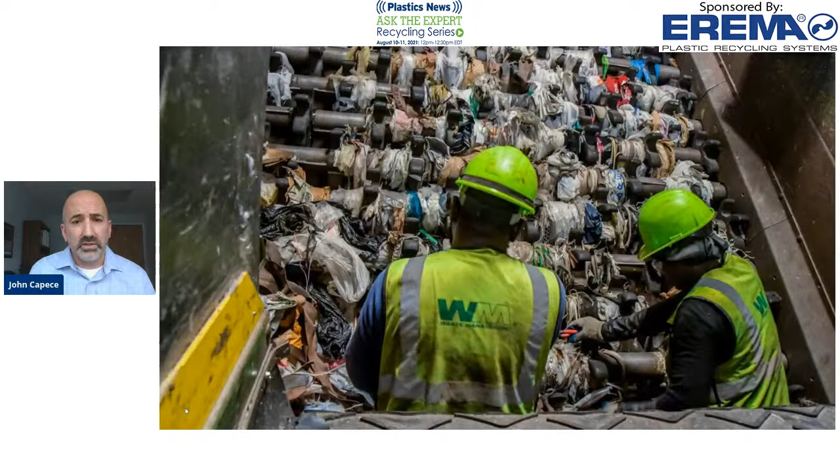So this would be an example of the processing issues on the bags. At the moment, they have a tendency to get caught up in the rotors, causing tremendous amounts of downtime. So in order for these folks to keep up and running, sorting through the other types of materials that are recyclable, these materials are being collected in different manners, like collection bins at the front of a supermarket or a retail store. That way they can go to a dedicated recycler that is equipped to process them. Next slide.

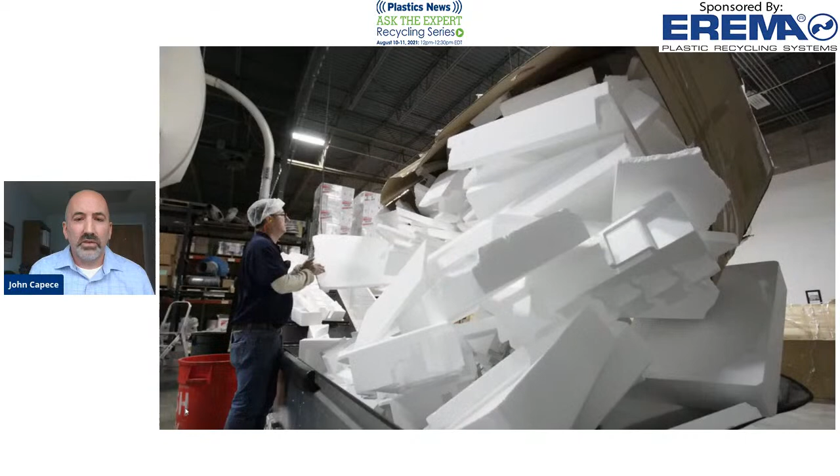And then on the polystyrene side, one of the challenges is just the bulk density. They take up enormous amounts of space. For example, if you were to take this styrofoam packaging and fill up a 53-foot trailer, it would probably only weigh about 3,000 pounds. And then imagine hauling that across the country to the processor that's equipped to actually pelletize this stuff. The financials don't really make too much sense.

So the solution for this type of material is to really compact it and then ship it after that. We don't seem to be at that level where there are enough processors out there willing to take on this challenge, where they can collect, compact, and ship for further processing. Next slide.

Okay, there's a whole variety of different post-consumer plastics that we could talk about today, but we have a short amount of time, so I just wanted to provide a couple examples of input materials that you would typically see in a post-consumer resin. It could derive anywhere from a HDPE milk or juice container collected from households to HDPE rigids. These would come from like detergent or shampoo bottles.

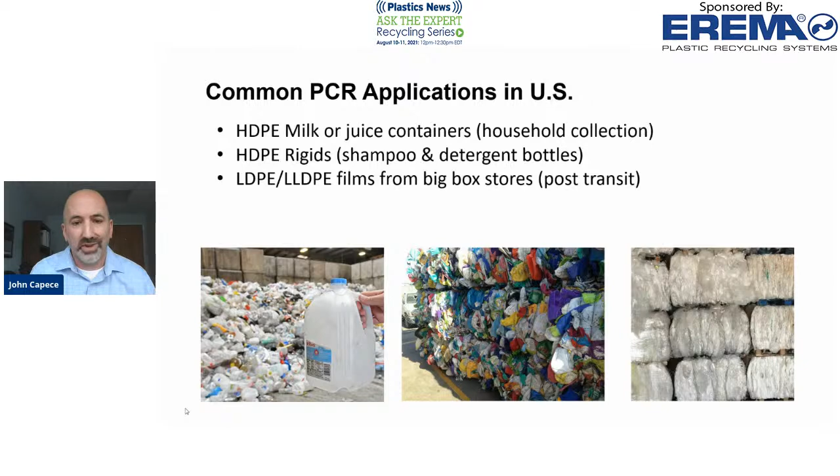Most of the time, the majority percentage of these bales are the polymer that the process is interested in extracting, but there are other contaminants that we'll talk about further in the presentation. Next.

Okay, so types of contamination. When you think post-consumer materials, it's already been in the hands of someone that uses it. There's shipping involved. There's all sorts of different types and levels of contamination, anywhere from paper labels, stickers, different types of adhesives. Keep in mind those labels are actually put onto the films or packaging with adhesives, so that adds another processing element. We see things like foreign plastics.

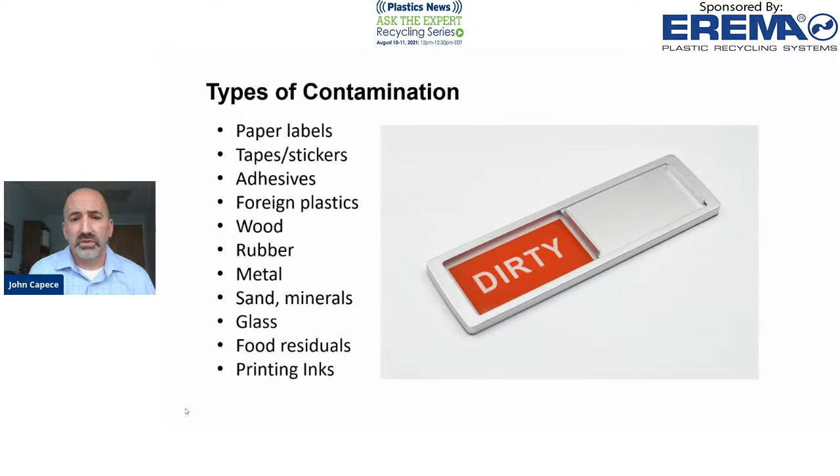So if you were processing a bale of stretch film, that could be PET bottles, for instance, within that bale. We see things like wood, rubber, metal. Metal could be ferrous or non-ferrous, aluminum cans or just pieces of steel. Anything from sand and minerals to glass, food residuals, and of course, printing inks. Next.

So this brings me to my next topic. You have this material that's already been in the hands of the consumer. It could have any or all of the contaminants that I mentioned in the previous slide. So one of the necessary steps is to sort the material. And what we're trying to do here is remove anything that's unwanted.

So for instance, if you were a processor that was interested in those stretch film bales, you don't want any paper or cardboard in there. You obviously don't want any metals or glass or anything like that. So after you open up that bale, you would need to sort, ultimately ending up with the polymer that you're interested in. Next slide.

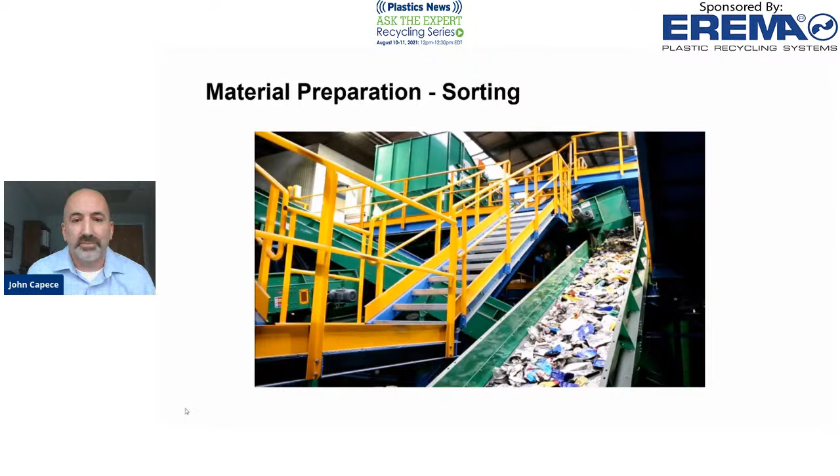So in addition to sorting, now that you've taken out all those other known contaminants, there are going to be things, say on that film, like the labels that we talked about, that need to come off. One of the ways we do that is to send the material through a washing system. Now, EREMA is not a manufacturer or supplier of a wash system. We do work with many in the industry, but the idea would be to deliver to the EREMA equipment input material that is previously washed, to get the majority of that dirt and sand and labels and adhesives off.

There are different types of wash lines, and I'm not going to get into it because I'm not a wash line expert. But the two main options are either a hot or a cold wash. What we've learned through the years is that particularly in the removal of labels, the hot wash is most effective because it loosens up that label from the film, melting to remove the adhesive. So you get that adhesive and label off, and the material is coming out much cleaner.

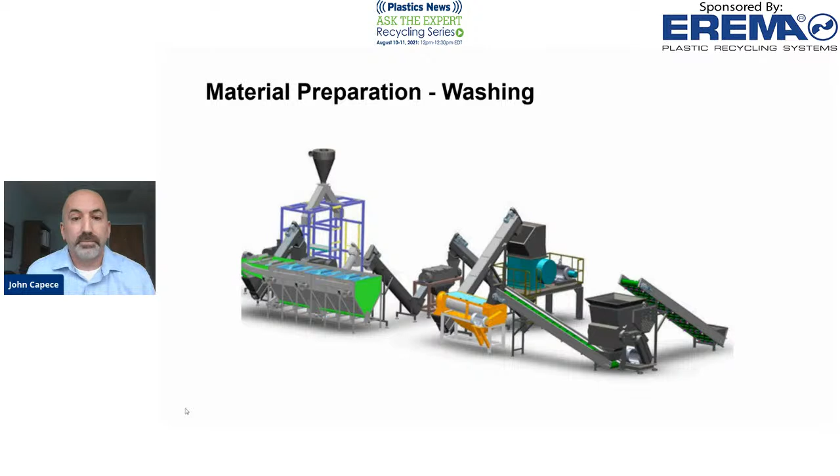And keep in mind, the reason that we're doing all these steps, the sorting and the pre-washing and all that, is ultimately to achieve a pellet quality that is very high and desirable. Next step.

Perfect. So here we have the EREMA solution to post-consumer recycling, and that model name is our Intarema TVEplus. What you see here is essentially a complete line from input material going on the in-feed conveyor, going up through metal detection, coming into our preconditioning unit. Then we filter, degas, and pelletize. Over the next few slides, I'm going to talk about that in a little bit more detail. Next.

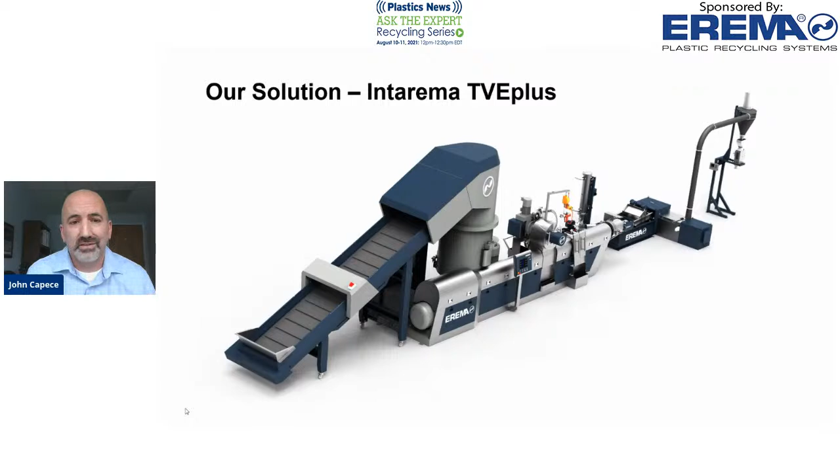Okay, great, thank you. So the EREMA preconditioning unit is the heart of the EREMA systems. This is where material comes into the drum, and on the base of this drum is a disc that's rotating at very high speeds, up to 750 RPM. Affixed to that disc are knives and knife holders that are cutting up the material, preheating, drying, homogenizing, and if the customer requires it, we can actually dose within that drum. A lot of these features give you benefits; because we're preheating the material in the drum, we're actually able to offer a shorter screw.

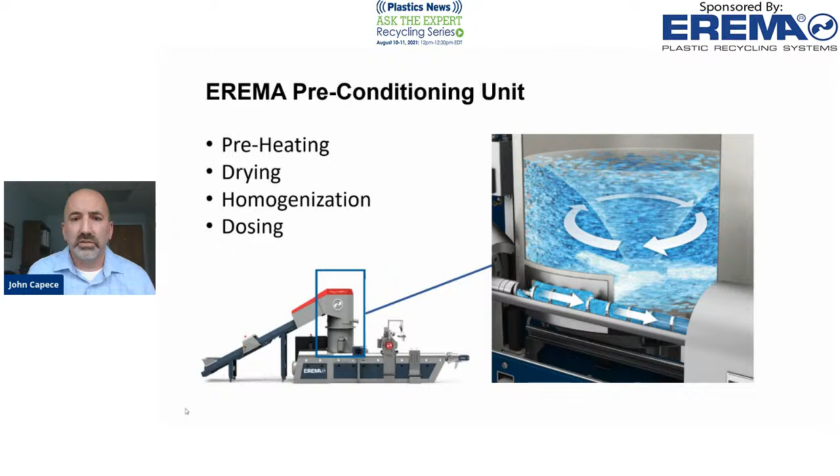Lowering that L over D obviously minimizes the dwell time of the melt in the screw, which ultimately will give you a better quality melt. And in addition to that, the preconditioning unit is providing a constant load on the intake section of the screw, and that provides a nice stable process. So it's a continuous process. When you're operating equipment like this, you always want everything to run very stable, and the preconditioning unit always providing a constant load on the screw is an important element.

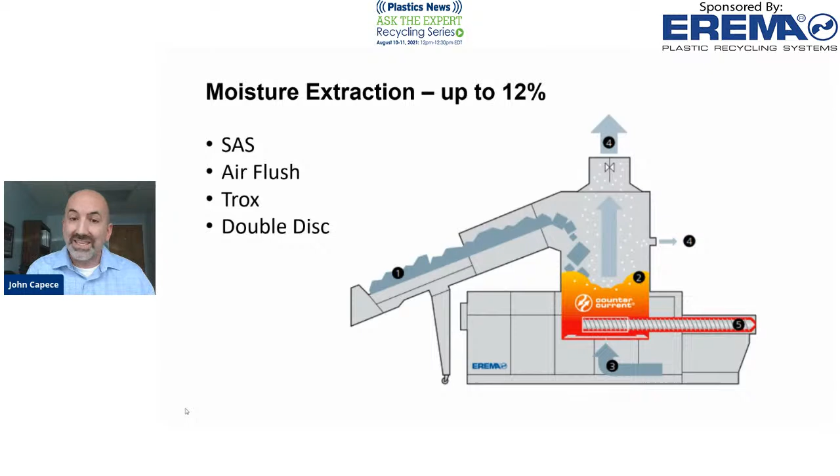But by adding things such as our SAS, which is a vacuum of air coming out the side of the drum, air flush, which is positive airflow into the base of the drum, and a Trox exhaust on top, the percentage of moisture in that material can be increased as much as 8%. And if we add a second disc, we can actually accept moisture up to 10 to 12%. So really, the EREMA is a perfect fit following a wash line because we're able to handle material in line without doing any offline drying.

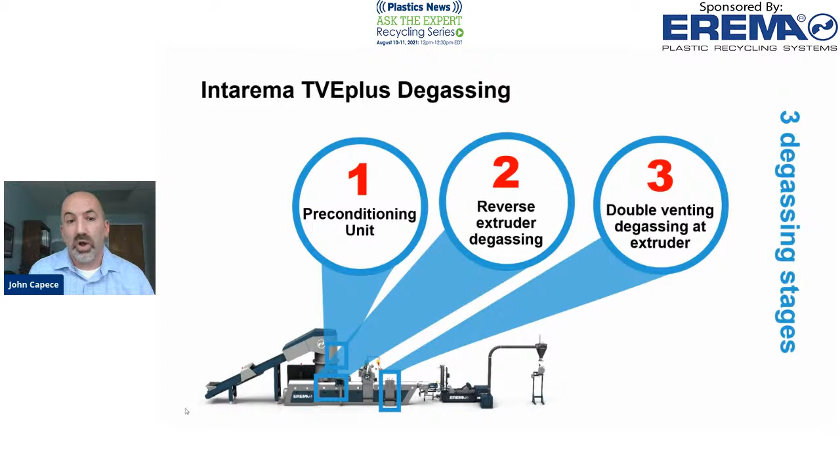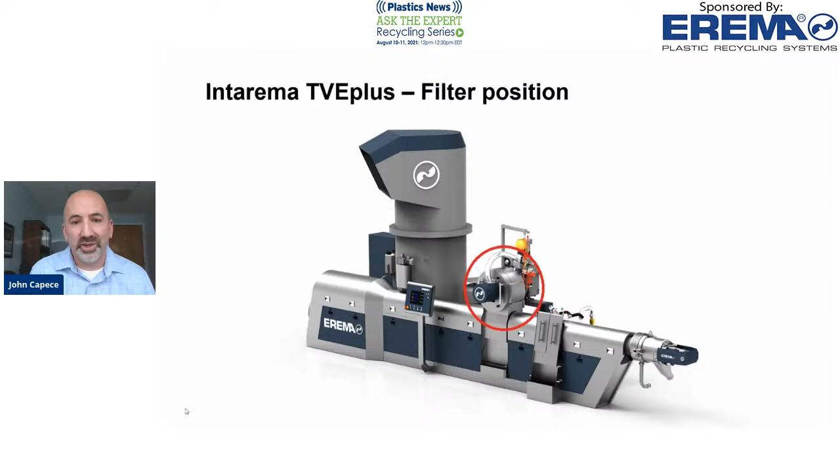All right, so a little bit about the laser filter itself. For people inquiring about the filter, the first question is, where are the lasers? There's no lasers involved in the filter itself, but actually we use them to make the filter discs, and it's made up of millions of tiny little holes. It takes about 2 to 3 hours to make just one of these discs, and we can go as low as 70 micron. We're doing some testing with 50 micron, but the idea is that the filter is continuous, which means that once you set it up with the correct discs and get running, it's continually removing contaminants off of the disc and then purging them into a container that lies beneath.

And the filter is rated for up to about 5% soft contamination. By soft contamination, I mean things like wood, rubber, foreign plastics, things of this nature. It's not designed to remove things like rocks and stones and glass. These are hard contaminants that can be damaging to anything on the line.

One of the things that our customers like about this filter is that it can handle very high pressures, up to 320 bar or 4,600 psi, and that it saves an enormous amount of labor because you're not paying someone to constantly change screens. Like on a typical screen changer, when you're dealing with higher levels of contamination, you end up changing screens a lot. So in addition to the cost of the screens, you're paying someone to stand there all day long and change these screens. The EREMA laser filter is perfectly designed to run nonstop for weeks at a time, for instance. The screens that are in there can be removed and cleaned and used again, up to about 1 million pounds. So there's a good lifespan on them as well.

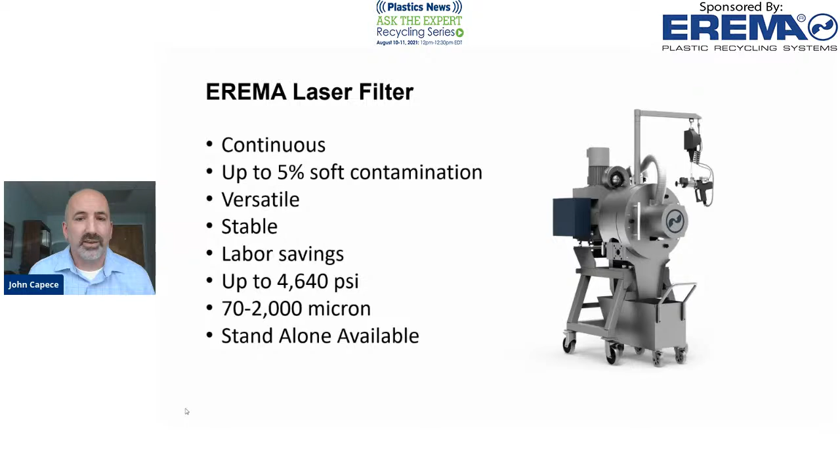Next slide. Oh, I'm sorry. Could we just play that video that I had on the laser filter?

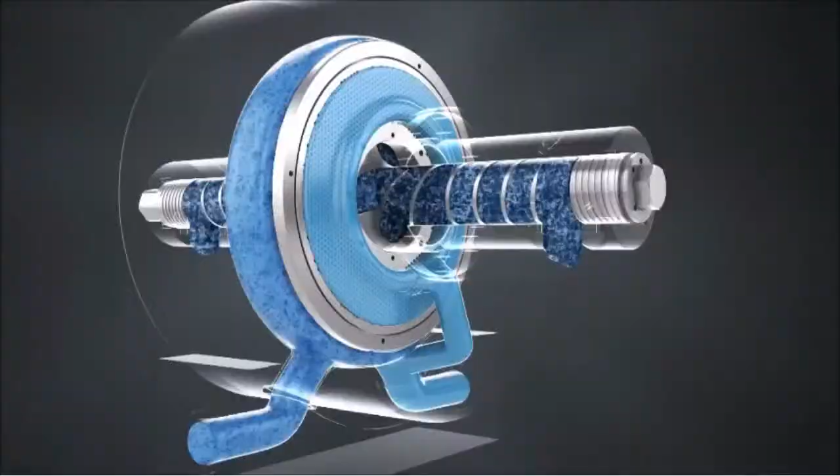Thank you for that. So as you can see in that video, you're actually able to see the routing of the plastic melt and how it enters the center of the filter. One of the major design benefits of the EREMA laser filter is that the actual filter mediums, the discs itself, are static. And what I mean by that is they're not moving.

The moving part that we have in the center is what we call a star scraper, which has 3 self-sharpening blades on either side. The only way for melt to pass through this filter is to go through the discs themselves. And like I said in the previous slide, we're able to reach very high pressures on that. For material like the fractional melt HDPE, for example, the laser filter is really an excellent choice.

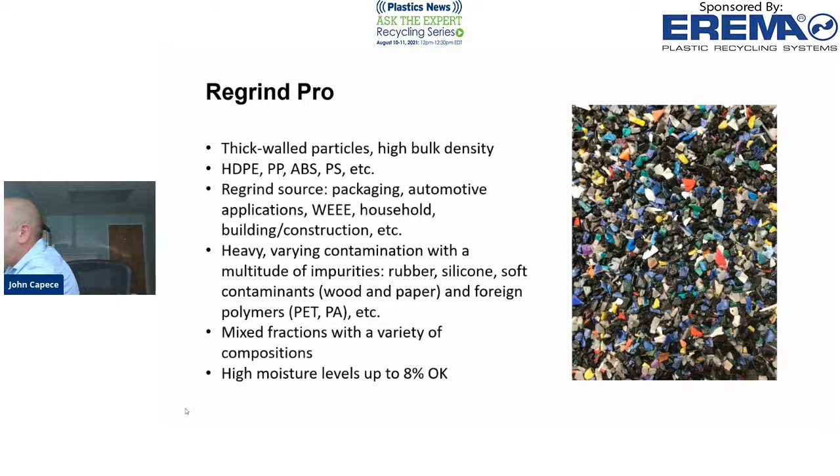Sorry about that. So as far as the process of the Regrind Pro, same machine, same setup, but what we're doing is we've slowed down the RPM on the disc inside the drum. So instead of like on the films where we're running 750 RPM, we're slowing that RPM down to maybe 300. We're really slowly heating up that regrind material to prepare it for extrusion. Like I talked about, low shearing because you're already going in hot.

An important feature of the Regrind Pro is that we're actually not trying to cut or size reduce the regrind that's in the drum. So we've replaced those knife holders with just these steel girders. And the reason that we do that is because if there's any contamination in there, we want to try to keep it as large as possible. And that makes our filtration much more effective because now we're filtering out large pieces instead of small ones, allowing any tiny ones to kind of pass through. And then, of course, as always, degassing immediately following the filtration step.

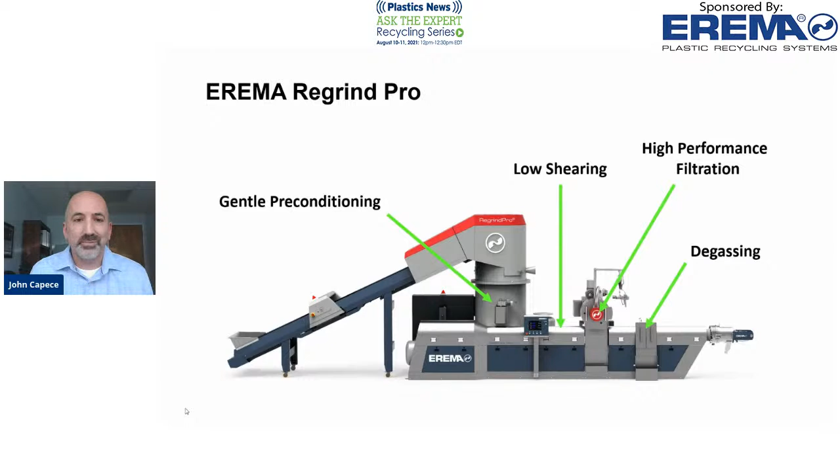For instance, if you were running HDPE and then later in the day or later in the week you're switching over to polypropylene, that could be done as easily as just changing the die, which takes about 15-20 minutes. Next up.

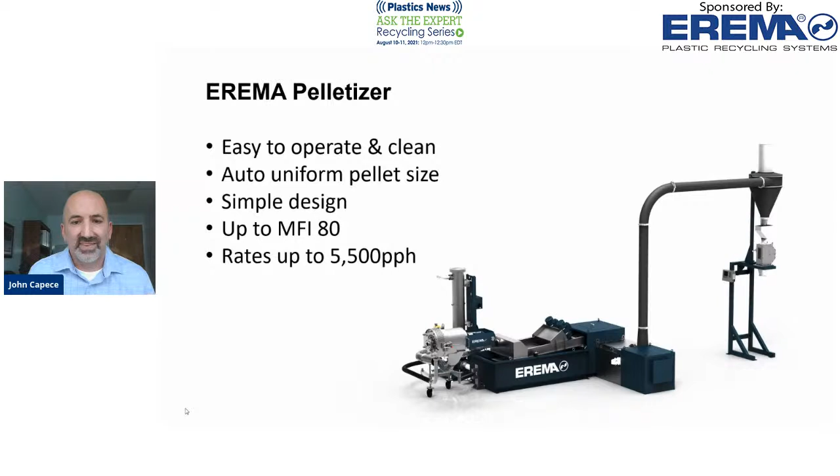It's essentially two silos where you have the finished pellets coming into what we call a process hopper. The working principle of this component is that we're filling up the silo and we have positive airflow at a specified temperature for a specified time.

The actual dwell time is based on trials. So we would ask our customers to send us, say, 300 pounds of their pellets, or we could produce 300 pounds in our lab, and then try to determine what amount of time it would take to actually remove the odors from those pellets. Then we would offer a piece of equipment sized appropriately. That could be anywhere from 3 to 7 hours or possibly more, depending on the amount and type of odor.

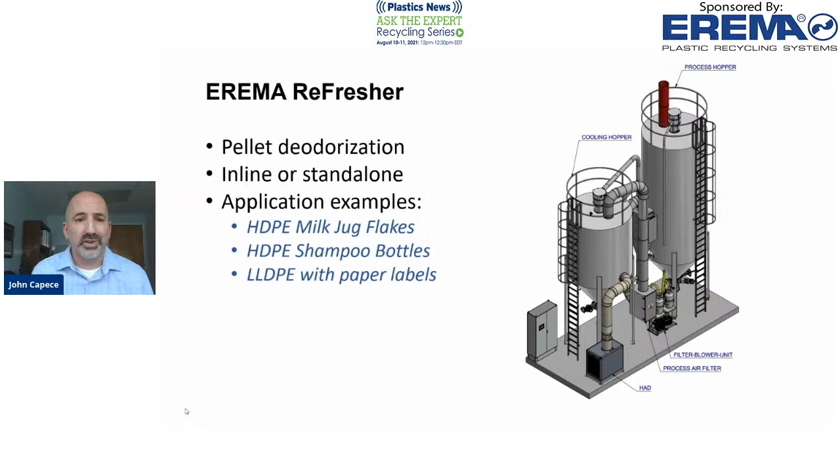This is a system that we would offer for someone interested in processing food grade HDPE, for example milk jugs. You would have that material washed and then fed into the EREMA, and then the pellets would go through our refresher system, giving you an FDA approved HDPE pellet.

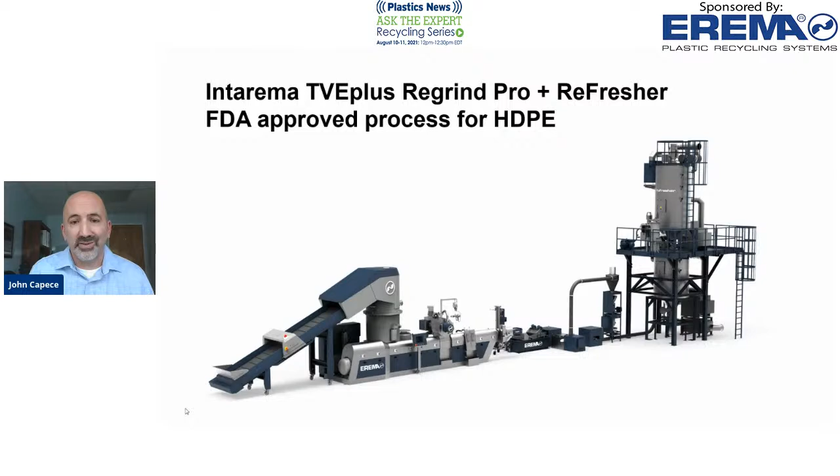We do have applications in with the FDA to also have polypropylene materials FDA approved. Those applications are still pending, but as soon as we're approved, we'll be making announcements on that. Next slide.

One of the major things that processors need to pay attention to, obviously, is quality. Just like any other product that manufacturers are making, our recyclers are making pellets, and quality is important to them, to their customers, and to the end product. So EREMA have auxiliary equipment to basically give our equipment and operators the tools that they need to try to maintain high levels of quality.

Sometimes there could be dosing requirements to improve the characteristics of the melt. So we would add an inline throughput meter that gives a signal back to the dosers, whether it be powder dosing or pellet dosing. That can be done automatically because the throughput meter gives that signal to the doser, so the operator wouldn't have to intervene. As throughput levels rise and fall, the doser would follow what the throughput meter is giving it.

In addition to that, we have a new development called Polyscan. This is essentially an indicator installed on the side of the preconditioning unit that can tell the operator what polymer is inside the drum. And I know that sounds crazy - an operator should know what he's running.

But if you can imagine being in a setting of a recycler where there's thousands and thousands of Gaylord boxes of material that need to be processed, sometimes things could be mislabeled or they mistrack. So it allows the operator an opportunity to confirm that he's running the material he thought he was running.

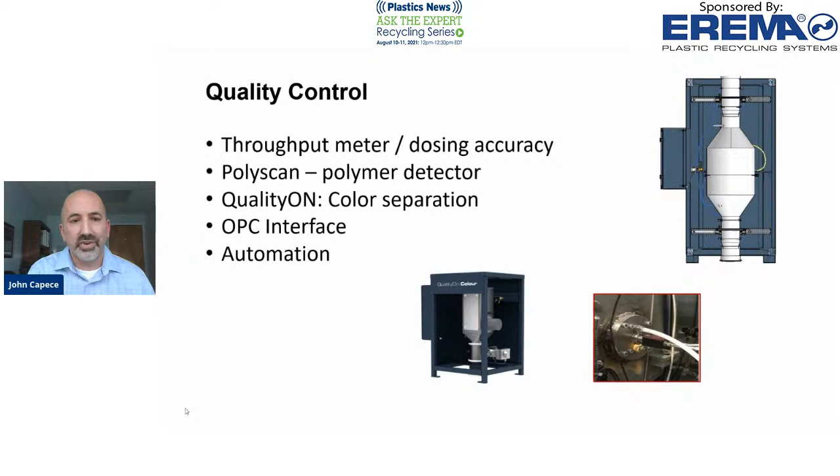As far as automation, there are several automated steps on the EREMA equipment, anything from speeding up and slowing down automatically, to auto feeding. In addition, pellet size: if there's variations in the input material, that can sometimes lead to variations in pellet size. EREMA have programming to allow the pellet size to stay consistent regardless of the variations in input material. Next slide.

It looks like I'm running out of time, so I'm going to go through the next few slides pretty quickly. EREMA offer the option to purchase spare parts online. You can simply put in the serial number of your machine and then see all the parts in a digital format where you can check availability, pricing, and order. Next slide.

The EREMA Blueport package is an app that you can have on your phone or your computer, and you can see live what your machine is doing, along with some key running parameters. In addition, you'll have access to the spare parts online and maintenance videos. Next.

Our company POWERFIL, or business unit POWERFIL, is dedicated to our filtration. KeyCycle is a business unit that can offer our customers full turnkey solutions. It's almost a consultative position where they can basically design a complete plant, everything from bales coming in to pellets going out and all the steps in between.